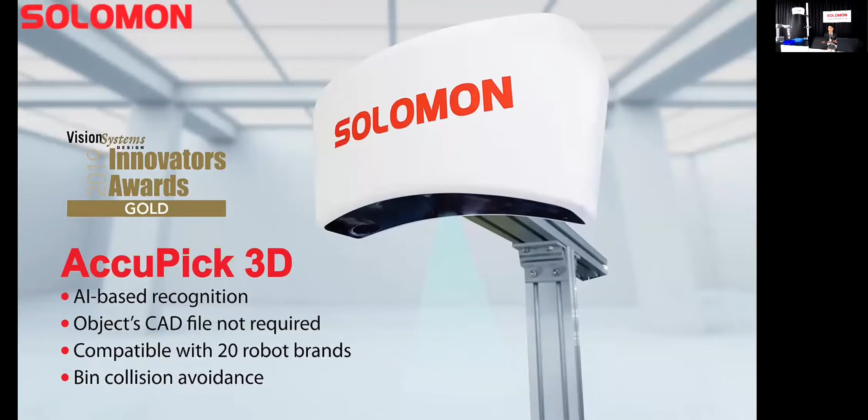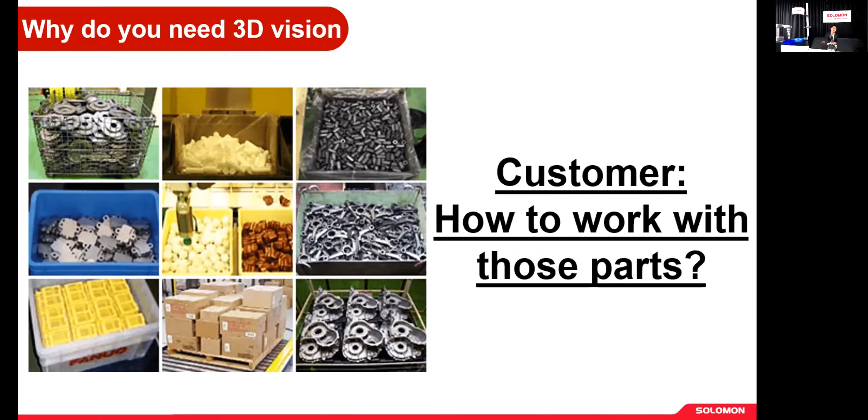I will start from this picture. These are very general parts you can see in almost every factory - metal, plastic, parts on the pallet or in the bin. But the customer has one question in mind: how to deal with those parts when doing robot pick? So traditionally, you do a traditional feeder to guide your parts into the same orientation, or you have to see different faces, bottom view or top view.

What I mean by traditional feeder is like this picture here. It could be a bowl feeder, it could be the conveyor handling by some guider, or it could be mechanical alignment, limited by some mechanical way. However, 3D vision in general uses one single camera, powered by software. This is the huge difference, right?

I'll break this down to a couple points to convince your customer, or yourself, our end user. Think about the first point: flexibility. Our challenge is every day we have new designs of products. You change your lines often, you have new shapes, new sizes. The mechanical way has limitations - you have to fabricate, you have to change your motor or your guider every time.

However, for us, the software is so much more flexible. We learn from the programming, and by clicking your computer, you can change the different SKU immediately.

Second is about the footprint. In the factory, I think space equals money, right? The mechanical feeder is usually more than 3 by 2 square meters. However, a single camera with a stand or on the robot is only 1 by 1 square meter max. So think about this - if you use vision today, you can increase more than 3 lines. That's a lot of money saved for the production line.

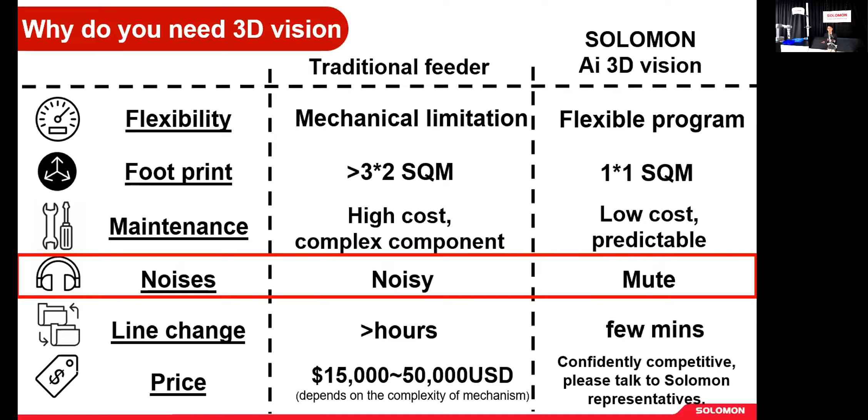About noise - factories are designed for a user-friendly, operator-friendly environment. The vibrating table has to make friction to guide the parts, so noise cannot be avoided. But for the camera, it's kind of a muted function if you compare it to the mechanical feeder.

Then there's how easy it is to use when you have different parts. For the feeder, sometimes even one feeder is not suitable for different sizes - you have to change your guider, change another feeder, and that takes hours for sure. However, for the software, you click the computer and change the program.

The final, but most important thing, I think, is the price. I would not say vision is the cheapest, because some feeders could be small, but for medium or big size feeders, they're kind of complicated inside. So you have to think about flexibility, footprint, maintenance, noise, and those things combined together, and calculate again in a total general comparison. We are confident we are competitive in price in the general consideration.

That's how we beat most of the challengers. For the detailed price, you could contact the local sales - I believe they will give you a happy price for sure.

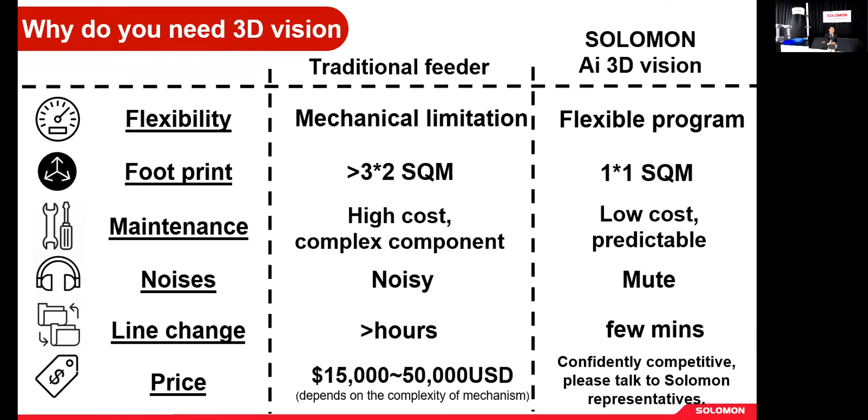This is not about Solomon only - I think this general 3D bin picking idea can apply elsewhere. But here we have the Solomon AccuPick general picture. We cover from the scanner, software, robot control, and the PLC.

For the scanner, you can have a different spec - for example, different precision, budget. You can either use the Solomon 3D scanner, or you can use the Intel RealSense for a more budgetary scanner, depending on your accuracy needs. For the AI-based software, later on Sumi will give you more detail on how to use it - I'm going to just pass it here.

For the integration, the robot - compared to competitors, most of them are only sending you the picking position, but they're not considering the motion planning.

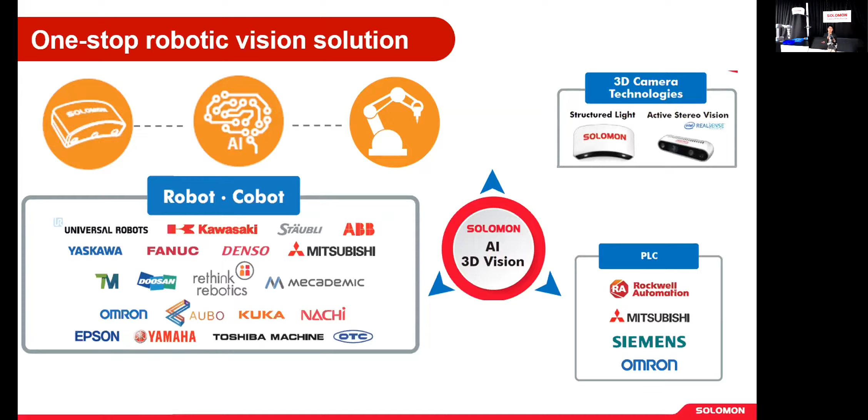Sometimes you have to think about how to avoid bin hitting and how to control the gripper. But that's the most amazing part because Solomon covers it all. In our interface, after you get the coordinate, you can also connect to the robot and do motion planning, how to pick this part and how to avoid hitting. Those are all in Solomon's consideration. So I think that's a really big selling point for all of you guys. We can also integrate and communicate with PLCs like Rockwell, Mitsubishi, Siemens, or Omron.

Right, so for the eyes, it's about the scanner. Of course, you'll consider first the Solomon structured light scanner. Every time we scan, we give you a light pattern. This light pattern helps define the depth of the parts. And under the 2D camera, we can see the XY. So in total, it's six-axis consideration when we go to pick.

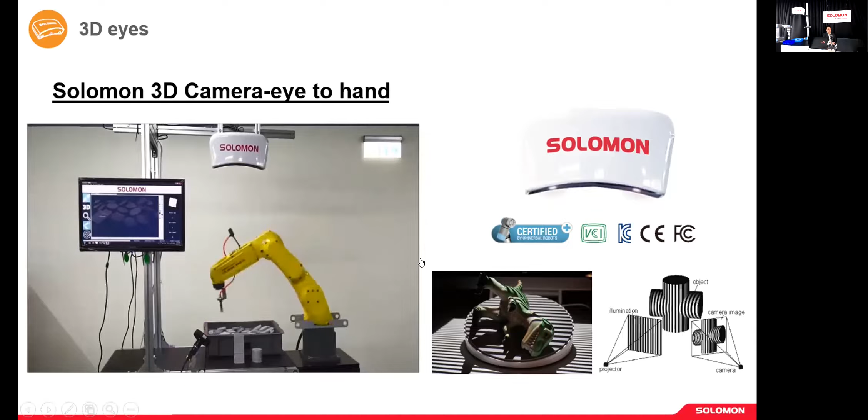A lot of people complain about the price and also the ease of use, so that's why we integrate with Intel RealSense. This is a much more affordable camera, you can Google it on the internet. At the same time, it's really compact in size, and you can also do eye-in-hand, meaning you can literally mount this camera at the end of the axis. So I will show you the video.

By the way, if you go to Intel RealSense Robotics Partner, you will see the Solomon logo there. It means we are an official partner, so you can give us more trust.

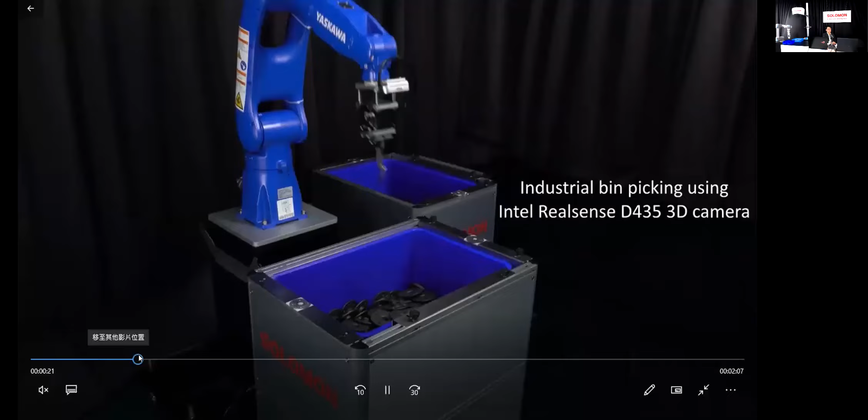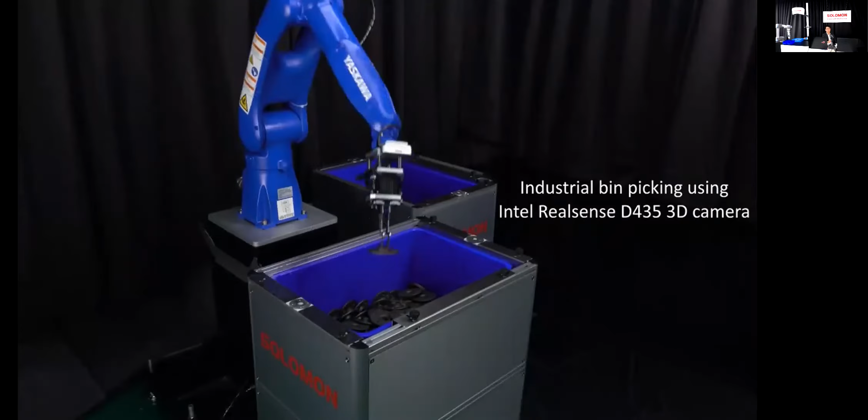So here you can see this camera, we put it at the end of the arm, like the eyes of the robot. Every time you want to pick something, the robot will go take a look, right? And then analyze it with our software, then go to pick. So if you have more than one bin, for example 6 bins surrounding you, it doesn't matter, because the eyes always go with the robot, giving you really high flexibility when you want to check every bin. So this is the Intel RealSense, our second most popular camera in our production line.

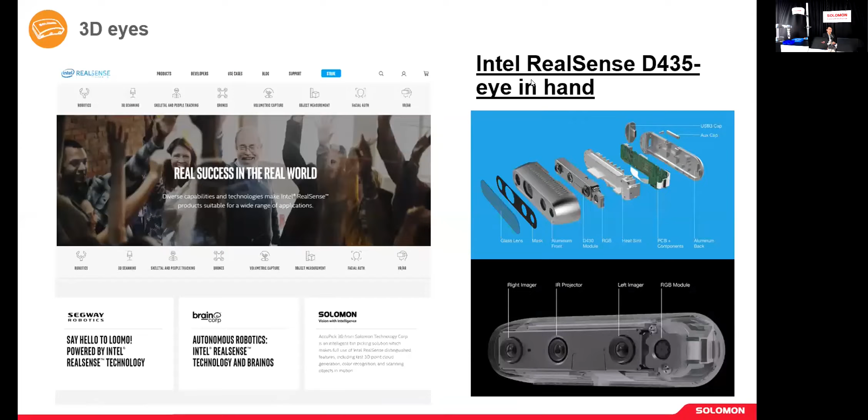Okay, after the eyes and scanner, we talk about the AI engine. A lot of people question us: Solomon, what's your AI? Why do you say you're an AI-based company? I'm not a technical person, but I'll give you the brief concept. We have a department with really genius brains who develop the algorithm for these neural network things.

So when you input the pictures, they will start to converge, or technically we say pooling. Pooling means we cut the pictures into squares, like a swimming pool, and we take out only the features from that pool and analyze them, converging that data into the final result. Then we compare this final result to our database, so we can find the most ideal parts from these pictures.

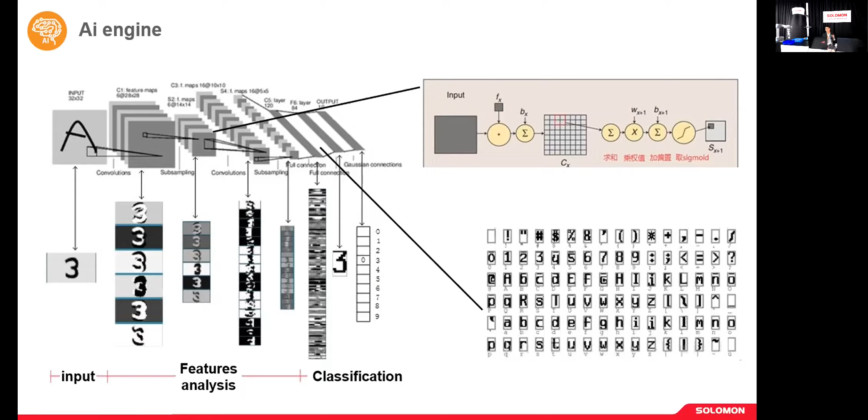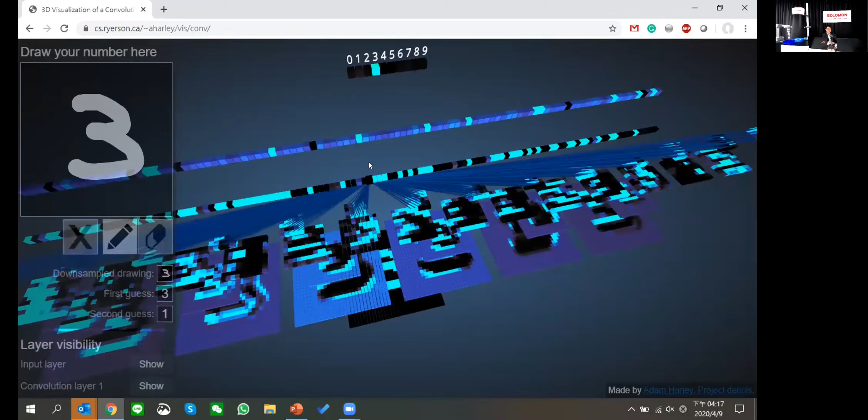Here I have a simulation of a neural network. For example, today I write the number 3. It's kind of ugly, right? But in the neural network, it will start to analyze. You see a lot of blocks here, it's like the swimming pool I mentioned, and they take out only the feature part, analyzing it into the next level. They converge those feature data into the final result. So here we got 3, and the second guess is maybe 1. This is the simulation for our neural networking.

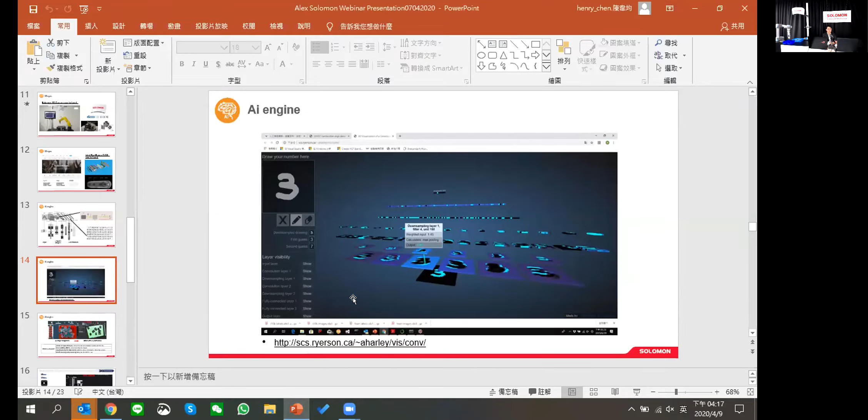For more detail, please contact your local sales, and they will give you much more engineering detail. But what can we do with this AI-based technology?

Some of the parts, like raw material, you don't have the CAD file, right? Sometimes your parts are shiny, some parts are transparent, the CAD file just doesn't match with the parts.

Today your customer just hands you very random things. For example, they give you the paper or they give you the mouse. You couldn't generate the CAD file immediately. But with our software, you can just take in pictures using our AI-based engine to analyze how it looks, and we are able to locate these parts and match them with the 3D point cloud generated by the 3D scanners.

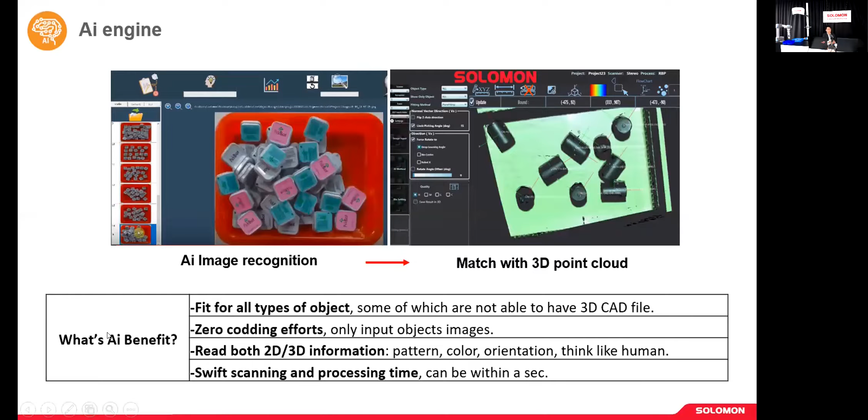And a final point I want to highlight is about the timing, because cycle time always matters in the production line. So in the fastest case, we can even scan in and get the result within a second. So that's about the AI engine part.

So this part will also be demonstrated by Sumi later on, how to control the robot to make the bin picking really easy.

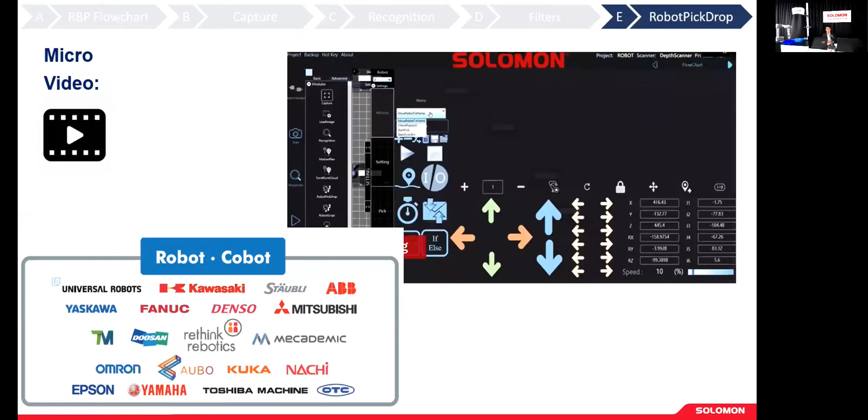All right, so we go through the scanner, software, and the robot control. I'm going to guide you how, when you've got the parts, you analyze it and what reference we have done. So generally we have two parts.

The first part is for manufacturing, the second part is for logistics. For manufacturing, usually you need very high accuracy, more than at least 4 millimeters, let's say. So in this case you have to do deep learning for the ID - how it looks, what the surface is, you have to teach it, you have to make it learn. And sometimes the position could be completely random. This is the high-level bin picking application - you have to think about the obstacle and also the gripper.

And the second one, which we prefer, is semi-structured bin picking. It's shifted in position, arranged somehow in the middle way, but it needs our 3D scanner and software to locate the parts and do the pick and place. So you can do assembling, packaging, machine tending, conveyor pick, or loading and unloading.

And another big general application you can see is logistics. The spotlight for this one is that today the incoming parts are unknown. What I mean by unknown is today could be shampoo, tomorrow could be another pen. So we don't have time to do deep learning for those parts.

And what we do is use our neural networking to recognize the parts in 3D, and then we define the center point of the parts. So we go to pick with a lower accuracy, I will say around 1 to 2 centimeters. But the point is you can grip, line up, and do the packaging or pick and place. So that's about using parcel picking, warehouse order fulfillment, or the kitting line.

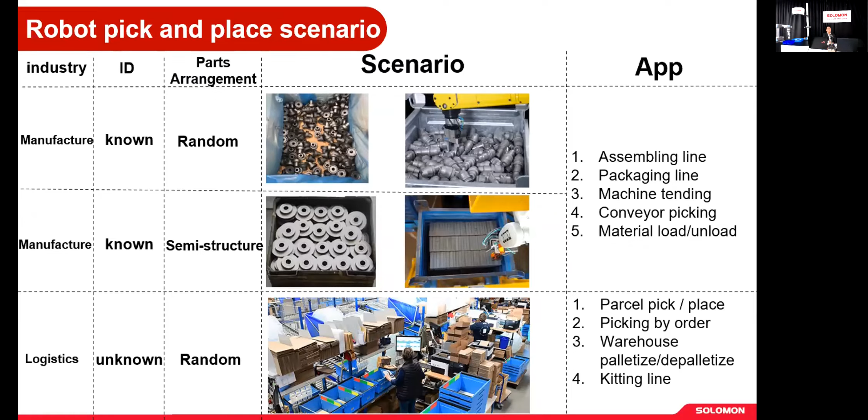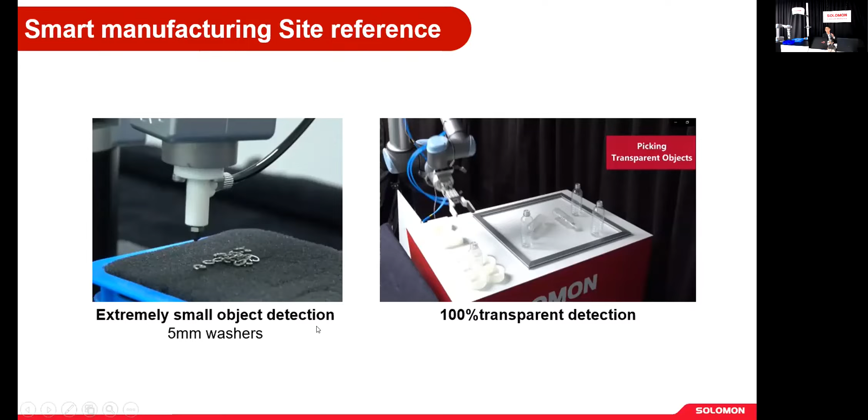Okay, so first reference, I would like to bring you the most smallest objects we ever pick. It's the 5 millimeter washer, and this is a real case.

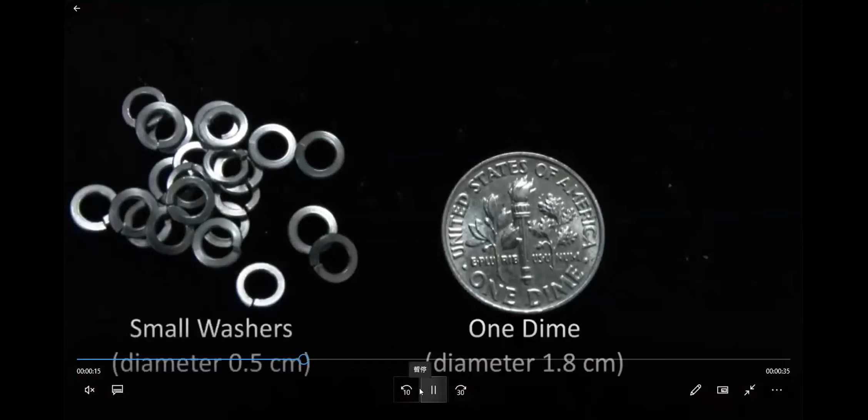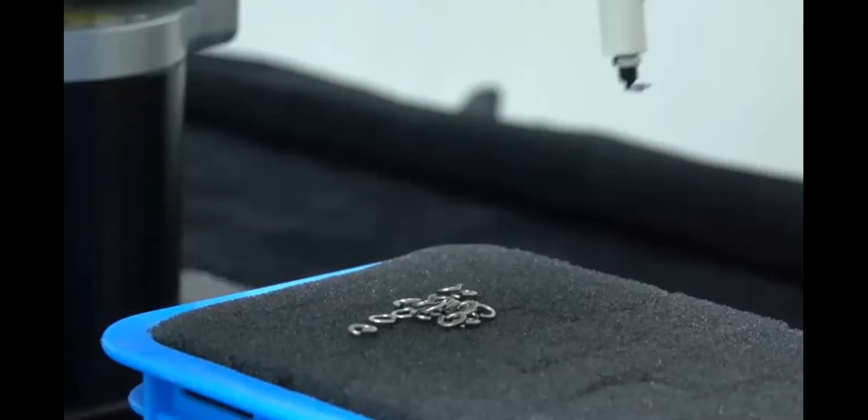Okay, so you see this is the size of the washer, and this end user is from the aerospace industry. What they do is they have around 50, more than 50 different kinds of small parts, and they need to do the kitting job by the order or by the demand of the assembly line. So the requirement in the beginning, they tried to use a feeder as well to solve those problems. But you see, the feeder doesn't fit all kinds of shapes and sizes. Reason why, in the end, they designed one Solomon scanner focused on the movable bin.

So there is a conveyor coming. So when you have the pickable parts, I mean you want to pick those parts, the conveyor will send a signal, come in and scan, and pick and place, do the kitting, and then the conveyor moves. So this is the idea.

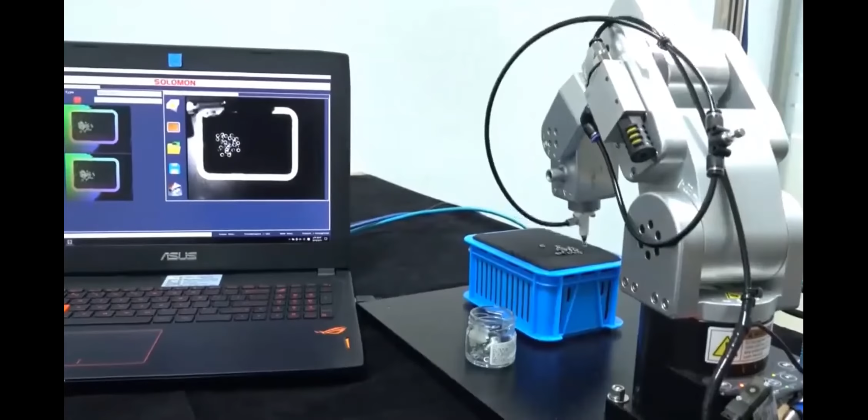And the challenging part is the things are very small. So we have to identify the center point of the ring, and then offset to the border of the ring to do the pick and place job. So if you have parts more than this size, we are also confident we can recognize and do the pick like this.

Second, I want to bring you transparent detection because this is something traditionally difficult to challenge. The light is an issue. If you have an environment light, sometimes transparent objects are somehow difficult to manage even if you have experience.

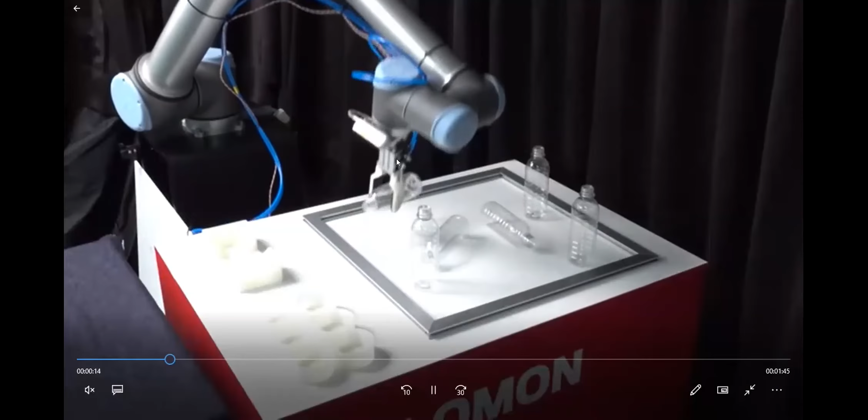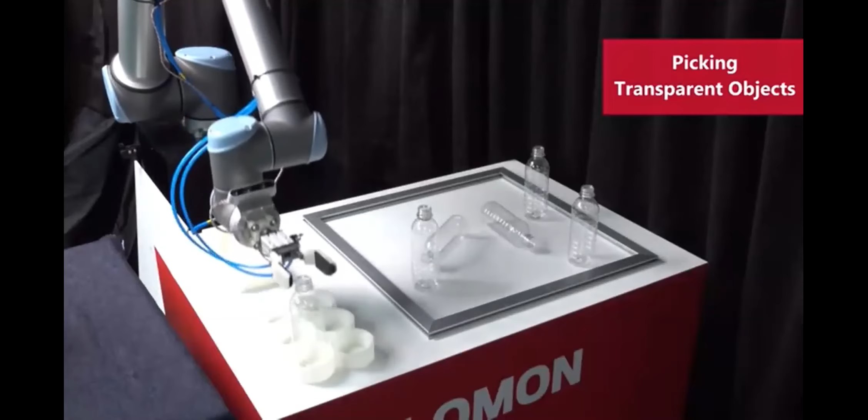So here we use one Intel RealSense camera, and we deep learn the shape of the bottle, then we can do the pick and place. You see here, even though they are transparent, the AI-based engine can learn the shape and locate the ideal picking position you want. It could be used in medical devices, some glasses, or we have one application doing wine glasses.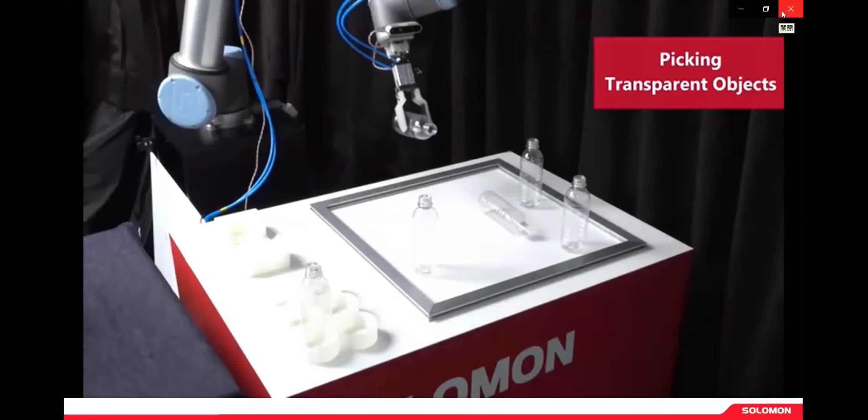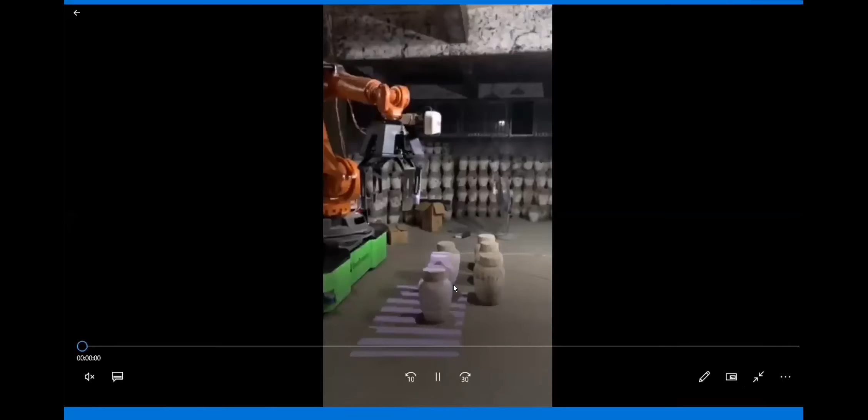Okay, and then I have the third application, doing the urn stacking. This application is implemented in China.

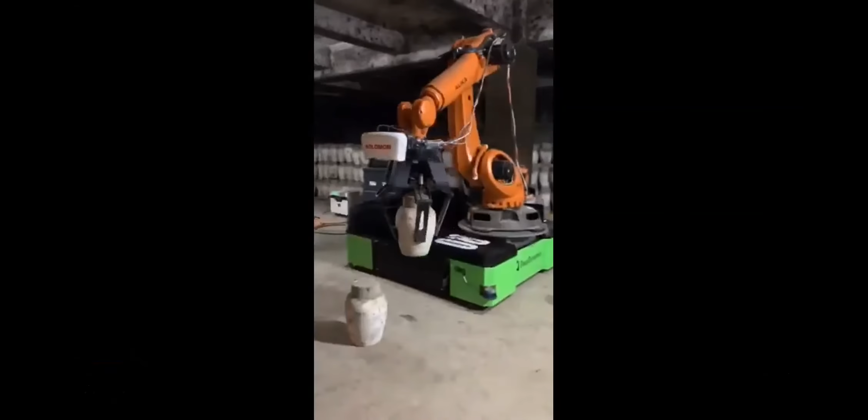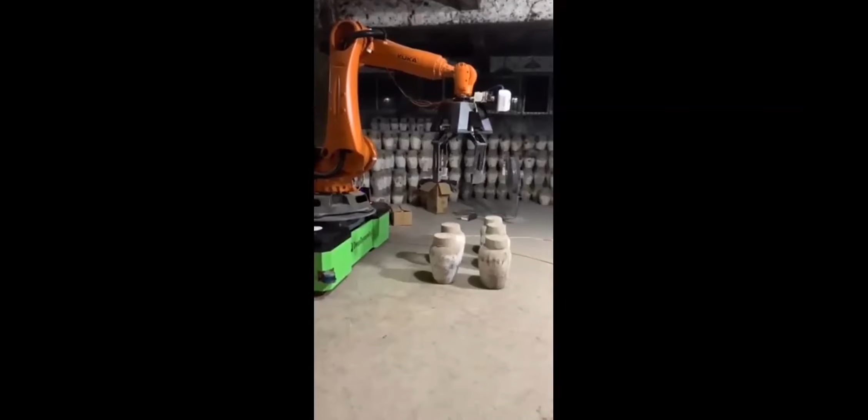You can see they produce those liquids. Before drinking them, you have to put them into the dungeon for about 5 years. They need human beings to stack up those containers because they want to maximize the space, right? So here the integrator designed one AGV together with robots, and the eyes, you can see the Solomon scanner here.

And we can recognize the top view of this urn and do the precise picking. I will show you the precision of this pick is about 5 millimeter accuracy. So we can maximum stack up 3 layers.

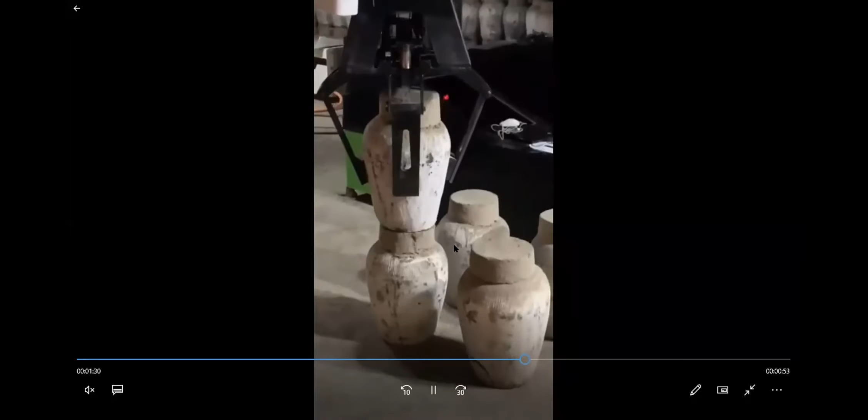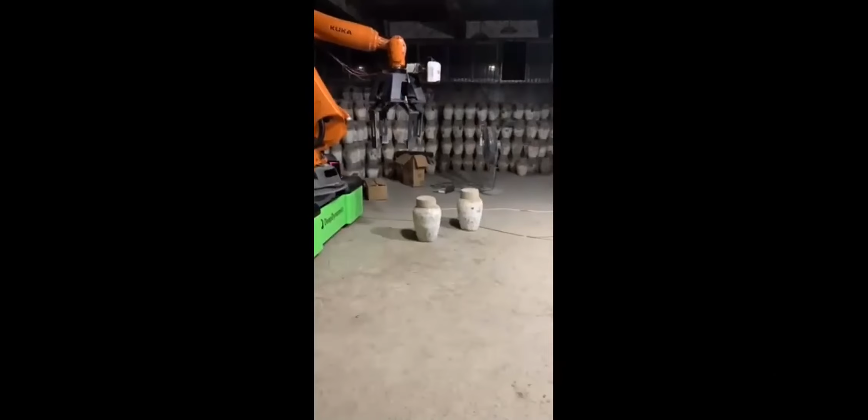So it helps their laborers not really do the tedious job again to move things that are more than a couple kg. Maybe they got hurt, maybe they don't like the environment. That's why we need to bring eyes to the robot.

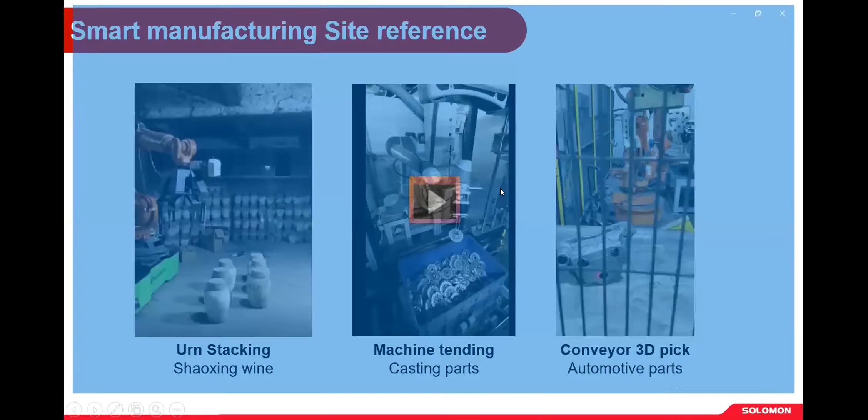Right here, we bring you the classic bin picking application, which is usually working with the CNC machine. So here you can see the parts have the top view and the bottom view.

I want to focus on bin collision avoidance in this case. You can see the gripper actually getting really close to the bin border. We have software to simulate where your robot and gripper are, together with the obstacles in the environment, and we can send you the coordinate without any hitting. That's the idea of this application. You can see how precise it can be.

All right, so not only from the bin, but also from the conveyor is also attractive for some of the end users. See here.

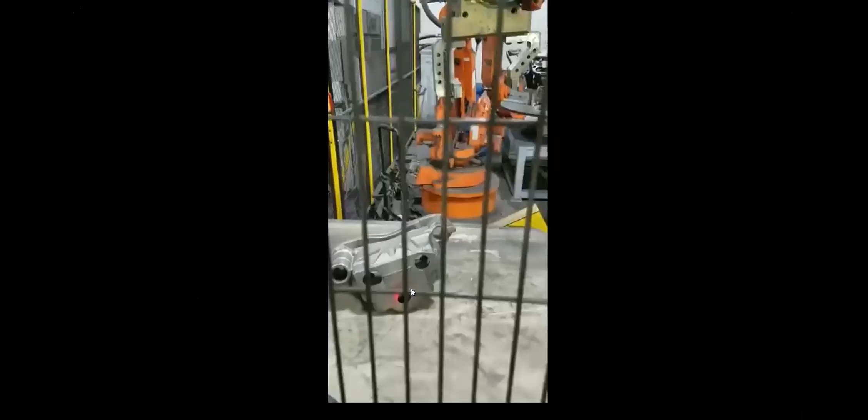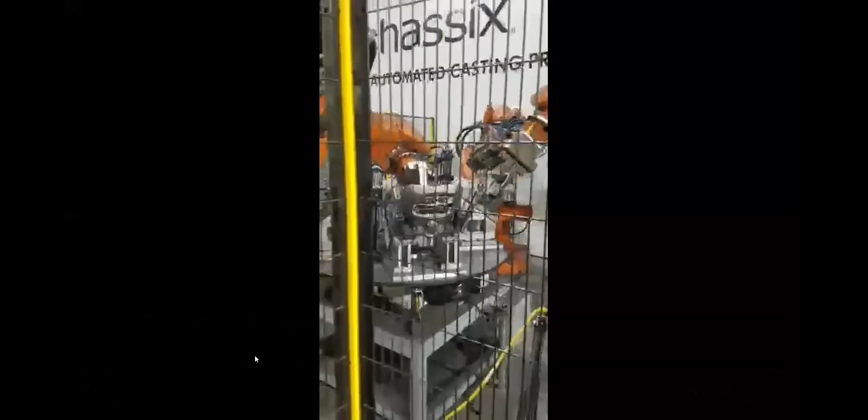The parts are for automotive, and the most important thing is they don't want to design any tray, or a pusher, or limit the conveyor to fit those parts. So what they do is manually feed in by the person there.

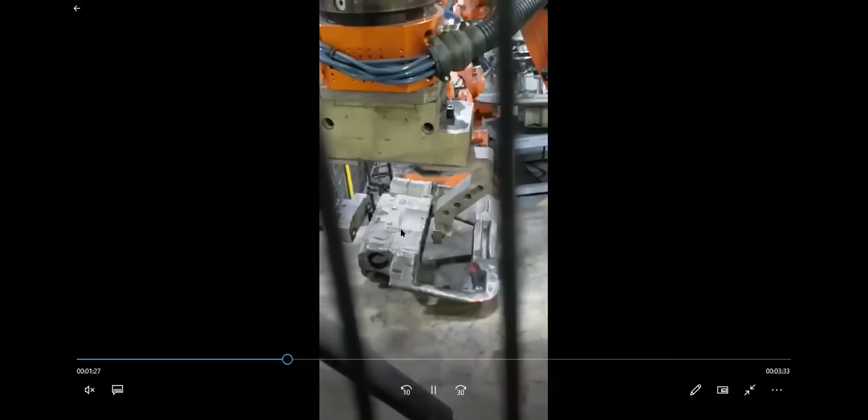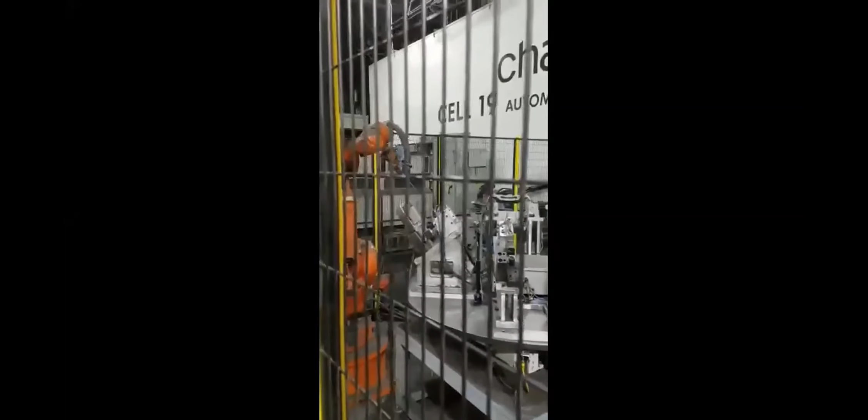And the parts come with a 3D position. After that, we scan, we get the coordinate in 3D, and then we place on the next station. So it's actually a really easy task for us if it's handled by the conveyor. We have so much experience. This is like level one conveyor picking for us, so we can implement this application very fast.

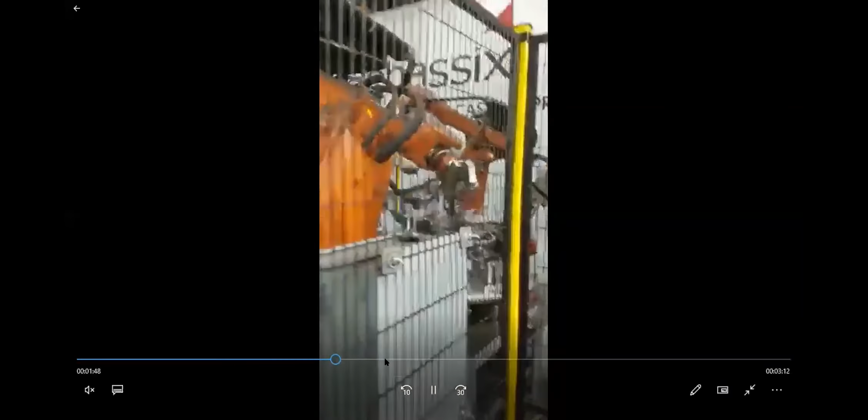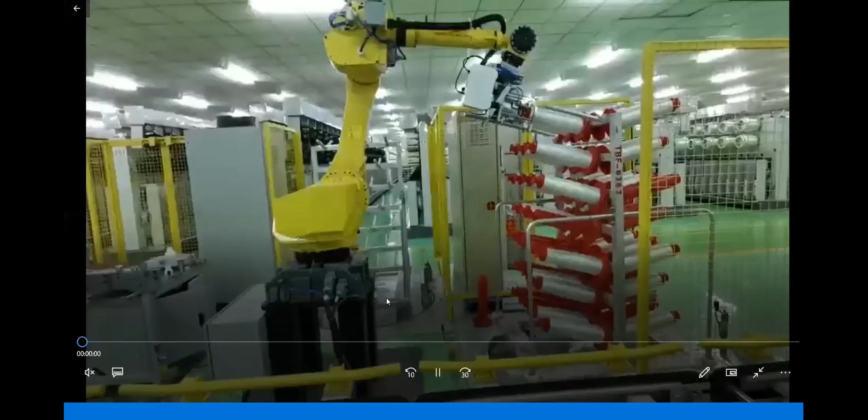And here I have the robot unloading application. See here, this rack is used internally in the factory. It's moving always from station to station.

So the parts, I call fiber material bobbins, when they are loaded on the rack, there is no way to always fix them in the same position, like the Chassix case - it's the same idea here. We don't need the human to align again, or mechanical alignment, but after scanning, we can see where the bobbin is and precisely pick the end of the bobbin to do the unloading job.

I believe with this kind of application, you can open your mind and check in your factory. I believe you can see a lot of rack applications, and please come to us, and we can analyze for you the return on investment, and also which camera is suitable for you.

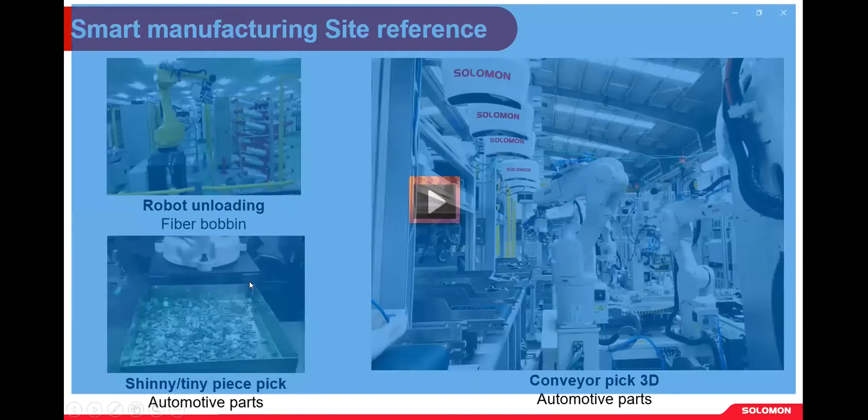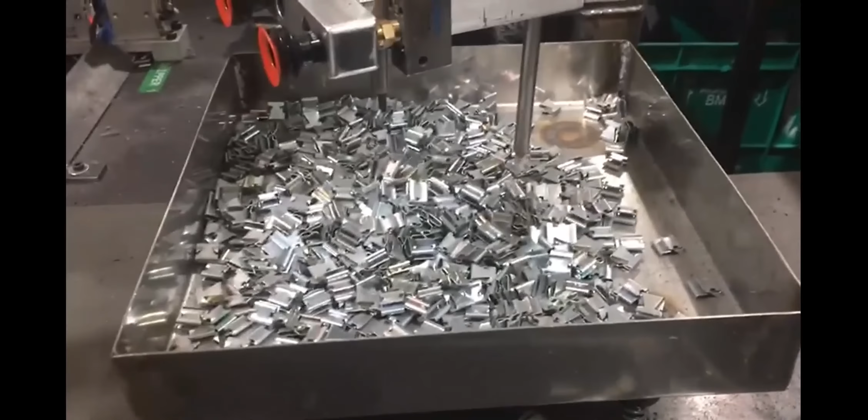So this is also automotive, because I believe automation still kind of dominates in the automotive factory. But this one is shiny and very tiny as well, so we have to recognize the top view and the bottom view of these parts.

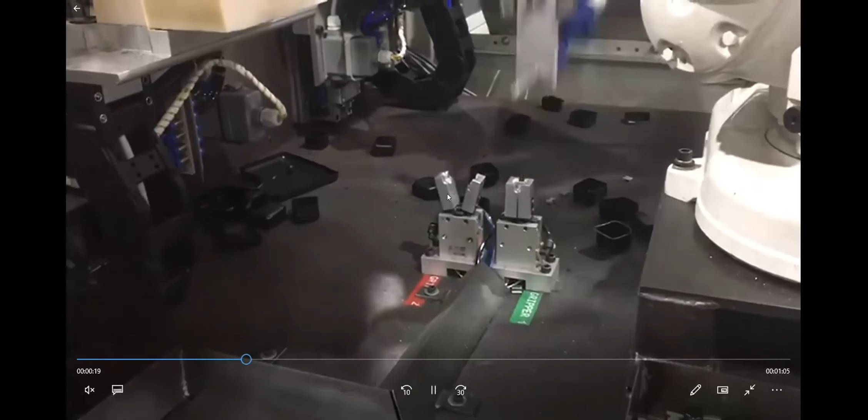Together, we will work with the second alignment station to make the accuracy much higher, more than 1 millimeter accuracy. And then they will do the after process. But our job is to recognize where the parts are despite being shiny, and to recognize the bottom and the top.

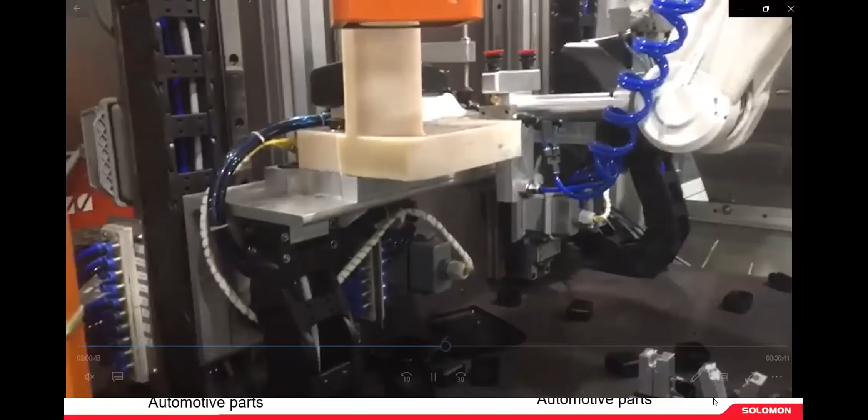So I leave the final, biggest project for the end. Due to confidentiality, I can only show you this picture. This is our biggest case so far. We have in total 13 cameras implementing this project in India, and the end user is a well-known global German company doing manufacturing for car air conditioning. Take a look at these pictures.

There are 3 points I want to highlight. The first is about space. Of course we compare again with vibrating feeders, but if you take a look, the space is actually really squeezed already. They couldn't fit in more bowl feeders in this scenario, and they would waste a lot of production line if they used a bowl feeder. Instead, they only used, at the end of the conveyor, one scanner implemented, and then one robot can work with the three scanners at the same time. So this is the first point.

The second point is about cycle time. When the parts are fed from the conveyor, you don't have to do any pre-alignment or pre-arrangement. Simply you scan and see the parts, even if they overlap, we don't care. In this situation, every time we scan, we get about 1.5 seconds, we get a coordinate. So the robot goes to pick, and when it turns back, we already have the coordinate again. So we make the robot nonstop.

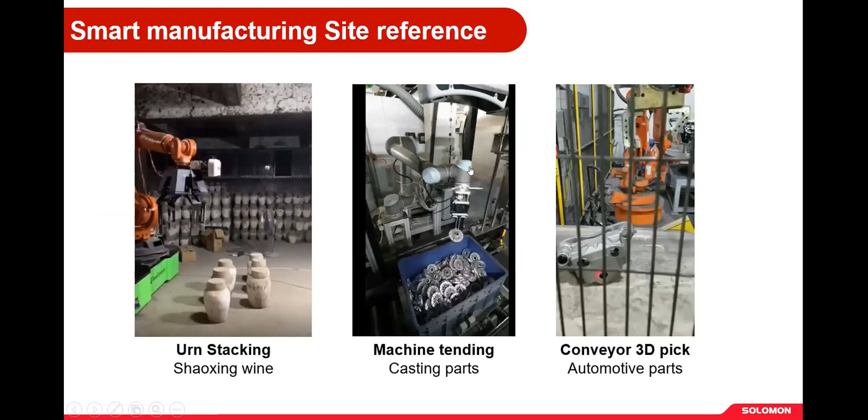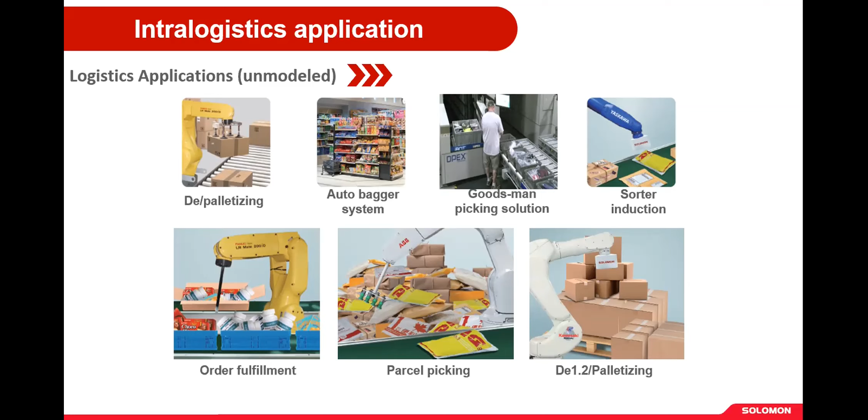So in the end, not going to take too much time here. I'm going to go through some logistics picking, which I mentioned before. We don't need to do any deep learning because we don't need much high accuracy like manufacturing. So we can do order fulfillment, parcel picking, or depalletizing things. For example, I'm going to show you the speed here.

So those parts, we didn't do any training, right? You can drop whatever you want and I will locate the center point for you. The cycle time really matters because think about it, the human being's hand is almost the same as this robot already. So if you have 3 shifts in a day, I think your return on investment could be fast because we work exactly like human beings.

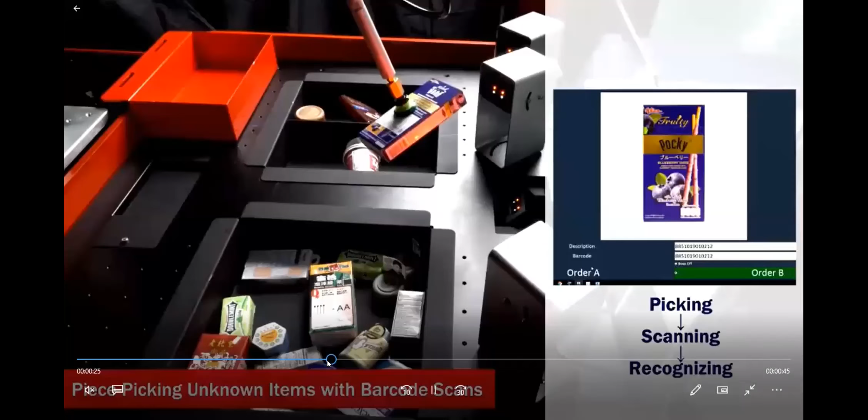You could do some applications, for example, if you want to check the ID, so after picking you can set up another barcode reading, so you can know where the part is and what it is, and where to put it.

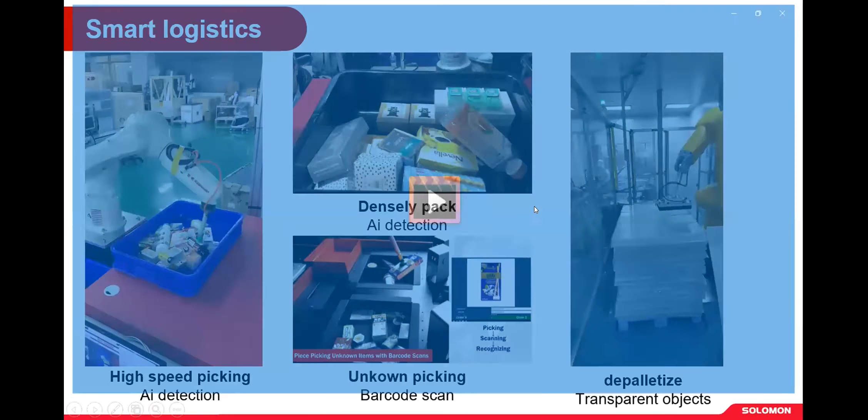And if your parts are really condensed, I mean densely arranged like this, we can solve it for you because we have online production experience to solve those compact pack situations. So you see, we are going to do precise picking for this case.

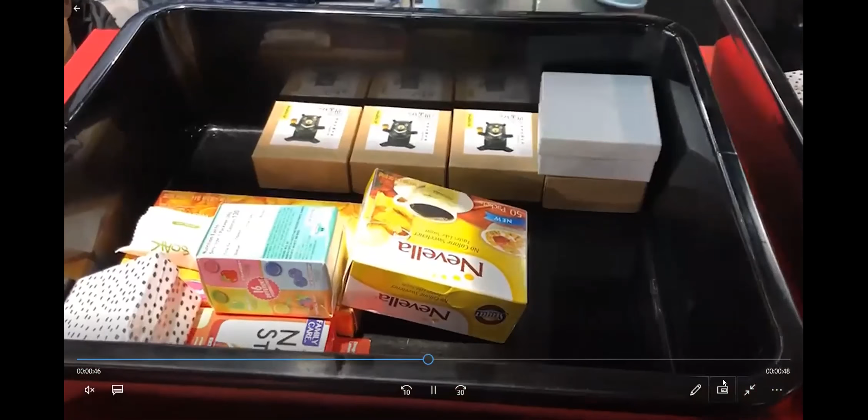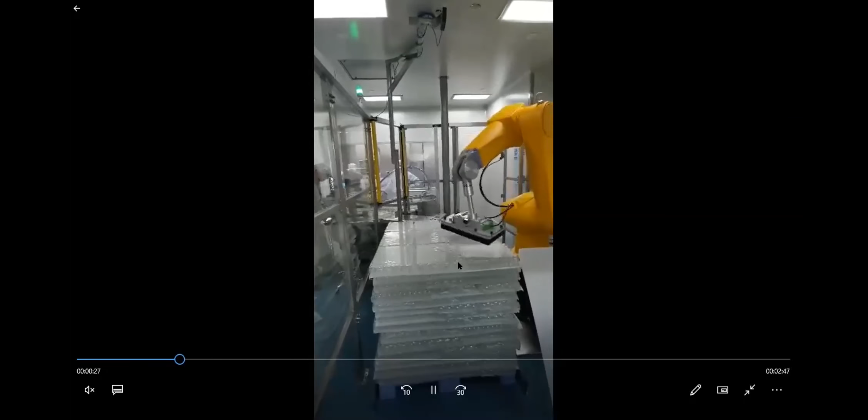And finally, this is the most common application in every warehouse. You can see the stack of glass here - the pack is not really in a neat position, it's kind of changed from the final position. So what we do is we didn't do robot teaching for the pattern, instead we learn the surface and pattern of the pack here, and then locate the center point to do precise picking. So even if the position changes, we don't care. Once you set up the scanner under the proper field of view, we can locate the parts and go to pick and place, even for depalletizing.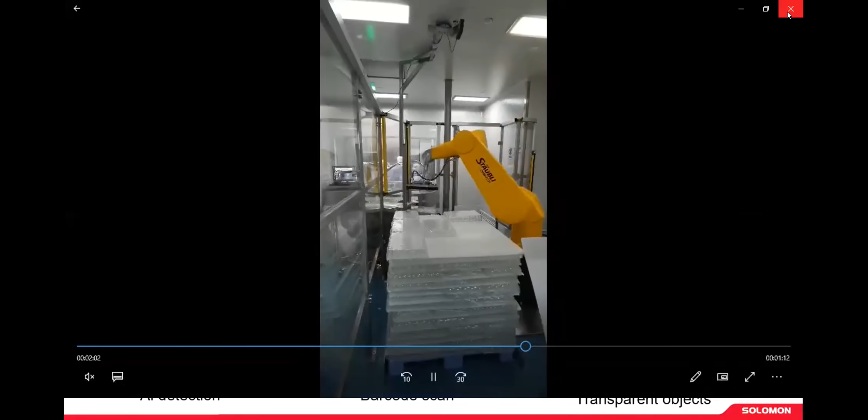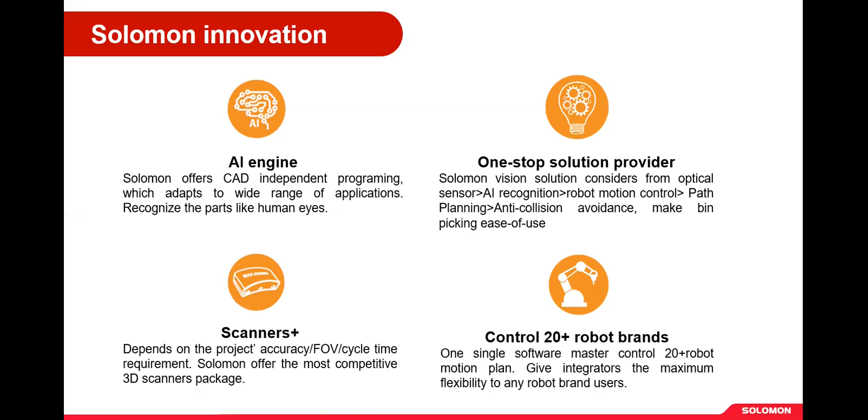So there are 4 points I want you guys to keep in mind, whether you are an end user or distributor. Solomon Solution Innovation brings you 4 points. First, we are an AI-based company - as I mentioned, we have a great team developing neural networks. Second, we have different scanners for different budgets, precision, and field of view cycle time. Third, we are able to control your robots, no matter if they are KUKA, Kawasaki, or Fanuc, whatever - we should be able to develop some master control to do motion control for your robots. So in the end, we provide a one-stop solution covering scanner, software, and motion control. So we try to make bin picking as...